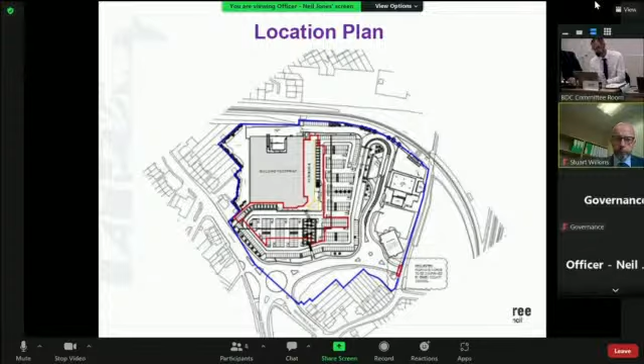But you can have pedestrians and cyclists, and it is a fairly well-used crossing. So just for wider context, Cut Throat Lane carries on up to Motts Lane, and there is a cycle path which is going to be continued, which I'll come back to later, going up to the northeast of Witham. This is the station down here, but we consider Cut Throat Lane to be quite an important corridor for transport, particularly sustainable transport.

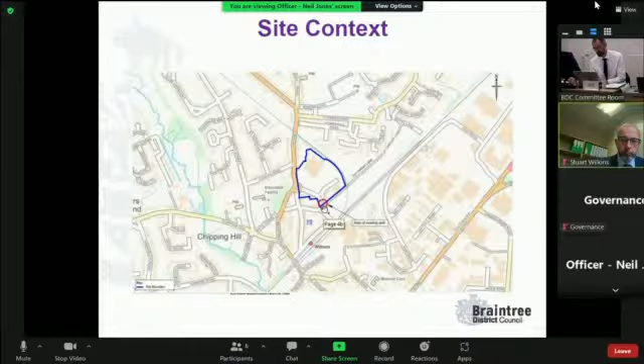A couple of photos just showing Cut Throat Lane, quite narrow as you can see. The survey drawings supplied with the application show approximately 3.7 metres in width on this side, coming down towards Albert Road. On this side we're down to about 2.5 metres in terms of width. So no footways or segregation, potentially two-way traffic, particularly as traffic comes into the entrance to the car park, which is just here. You can see we're potentially opening up onto what is a fairly restricted highway arrangement at the moment.

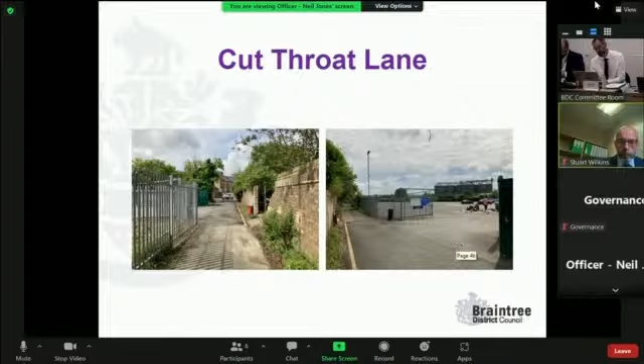Just in terms of context, this is Albert Road, the actual junction if you're going to come down onto Cut Throat Lane. This is looking just up from there. Traffic would come down from here and either continue down Cut Throat Lane to the commuter car park, or could continue around in a loop from Braintree Road to Albert Road. This is towards the station.

This is a drawing showing what the applicant was proposing with the application originally. So what they were proposing was demolition of the wall, as required by the condition, and providing improved pedestrian and cycle connections to Cut Throat Lane as part of the works they were proposing to undertake. But they weren't proposing to provide vehicular access, which is one of the things the condition did require. What they were showing on the drawing here is a curb would be installed along here with some form of railings as well to prevent vehicular access.

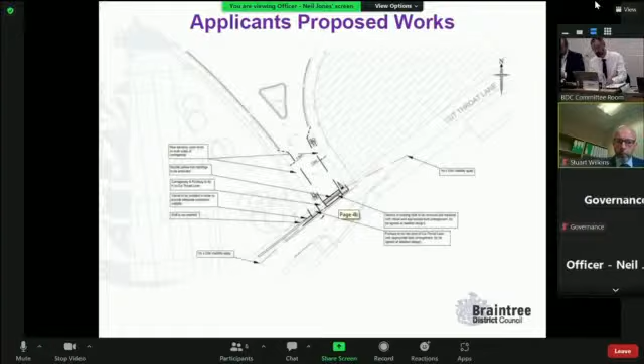The reason this was the proposal that Morrison's brought forward was that there was a discussion on site with highways officers prior to the application being submitted. Both the transport consultant for Morrison's and the highway officers were concerned that if vehicular traffic was permitted onto Cut Throat Lane with the current arrangement, it would potentially be unsafe given the restricted visibility vehicles would have of people walking and cycling, and vice versa, coming through to access the commuter car park. So that was the germ that led to the application being made to vary the condition.

Given the objections raised with the original application, we asked the applicant to demonstrate in more detail what the issues were. They provided a drawing showing some of the issues that would arise if the opening were widened, the wall taken down, and vehicular traffic allowed through. This would create a vehicular access with traffic potentially moving in all four directions—a complicated junction with restricted visibility. Even allowing for relatively low speeds, the visibility required couldn't be achieved because of the wall that would remain to the flats and beyond, which would restrict visibility severely to the sides. That's why, while we're satisfied safe pedestrian and cycle access can be provided onto Cut Throat Lane, vehicular access is not proposed.

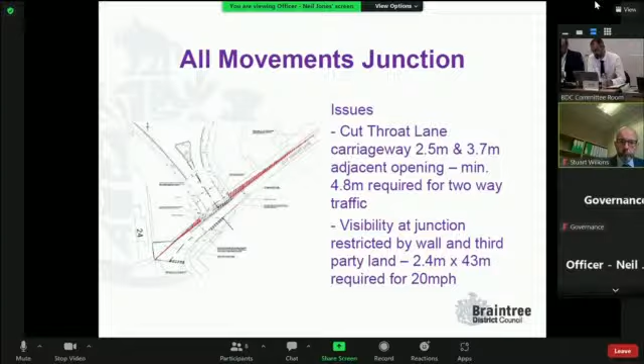There are also drawings provided by the applicant showing tracking of a vehicle at the junction, which show it would be very tight given the available carriageway widths for manoeuvres. While it's true there could be signage to restrict movements, if you're creating a junction with vehicular access there's a risk people won't follow the instructions, or will come down without realising where they're going, not want to go into the car park, and potentially turn off. The other real risk is conflict with pedestrians and cyclists using Cut Throat Lane.

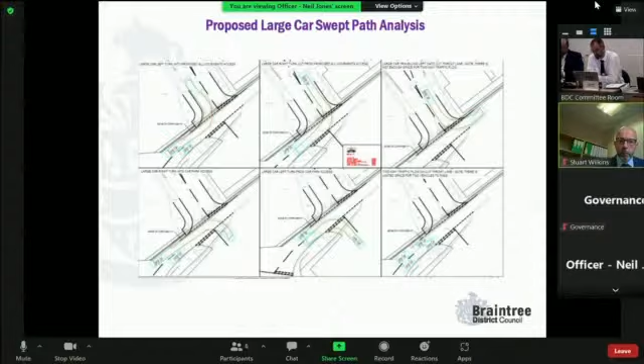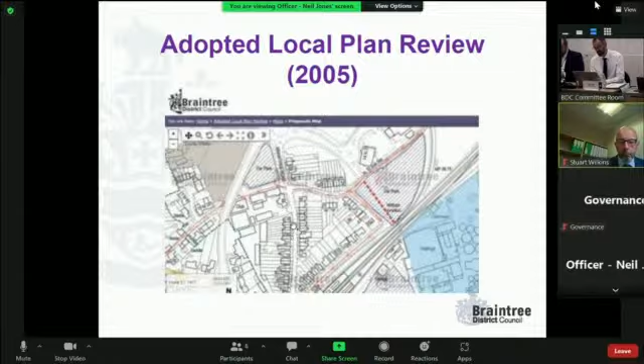There is a policy context to this—it wasn't simply something that spun out of the Morrison's appeal with the planning inspector looking at this on a whim. In the adopted local plan, the 2005 plan, there's a road improvement scheme. You can see here the Crichel Court flats, the roundabout, and the wall. This red dotted line coming across the commuter car park shows a potential road improvement scheme, with the idea that the unnamed road off the Crichel Court roundabout could continue through to Albert Road, reducing some of the vehicular traffic currently coming down Braintree Road and looping around the one-way system to get to the station.

That designation is proposed to be carried forward to the Part 2 local plan, so it's kept in. There haven't been objections to it, so it remains in. But having checked, there isn't evidence or modelling that supports the potential benefits of the road scheme. So while it's in there as an aspiration for the council, we unfortunately don't have a firm evidence base for what the potential impacts, positive or otherwise, would be on the local road network.

We're very mindful, as I've mentioned a few times, of the importance of Cut Throat Lane as a sustainable travel corridor. While it is open to vehicular traffic, and there will continue to be traffic coming to the commuter car park as at the moment, the remainder of Cut Throat Lane going up towards Motts Lane is lightly trafficked—very occasional traffic from perhaps the allotments and the odd house. Having walked and cycled along there many times myself, I'm yet to encounter a vehicle during the day, certainly outside peak hours. So it's quite an attractive walking and cycling corridor, relatively safe for cycling because you don't have that potential conflict with vehicles.

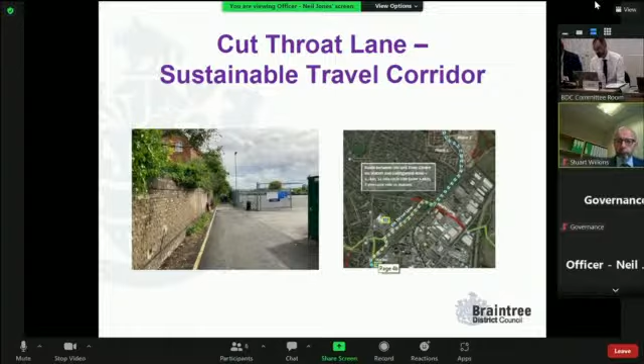This is the North East Witham development, which is almost completed, being built by Bellway. As part of that scheme, the cycle path will be provided across open space coming down to Motts Lane, where there's a bridleway bridge over the railway line, providing a pedestrian and cycle connection to Eastways, but also allowing a connection down towards the station. So we see this as an important walking and cycling route within the town, providing connections to the station and potentially employment towards the town centre. If we're looking at encouraging walking and cycling, we think it's important that this corridor is protected so far as possible.

So what we're looking to do is vary the conditions. The condition would remain as set out in the committee report - the wall would be demolished and the pedestrian and cycle connection formed. What we're proposing, because there are additional works we want to see, and a process to go through to gain approval and make sure the road is stopped up once it's opened - we think it will be difficult to cover that by a condition. So instead we're proposing to vary the Section 106 agreement already in place, specifically the first schedule, which was concerned with cycling anyway, making it a highway works condition.

So what we're saying in effect is there'll be highway works specified within the 106, between the Crittall Court roundabout down to the wall and Cut Throat Lane. There will be works involving the removal of the wall to create pedestrian and cycle usage straight away through to Cut Throat Lane, but the works will also allow future use by vehicles through to Cut Throat Lane when and if a safe through route can be achieved.

So the proposal is that the works are carried out so a vehicle could technically drive through on day one, but before the works are completed and before the road is opened, we would make sure a suitable barrier or means of preventing vehicles from driving through is put in place. That barrier or bollards could be removed at a future date if a scheme comes forward - whether the redevelopment of the car park, or the car park operator providing evidence that a connection should be formed through to the car park alone. But that would be done later.

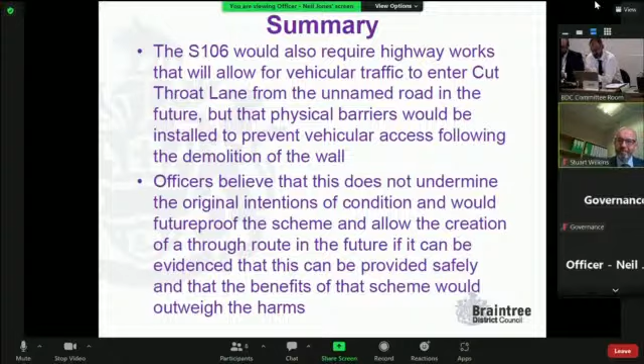I'm minded to support the officer's recommendation, given that it has the support of county highways, and there are achievable improvements to safety, such as visibility for cyclists and pedestrians. But I wonder about the 3 years. If these benefits are genuine, we want them as quickly as possible. Is there any way we can encourage Morrisons to bring forward the demolition works sooner than 3 years?

Yes, we did think quite a lot about the time for complying with the condition. It certainly could be a shorter period. We're conscious that legal agreements involving highways are very complicated, technical and quite involved, as Matt Bradley from the Highway Authority would echo, I'm sure.

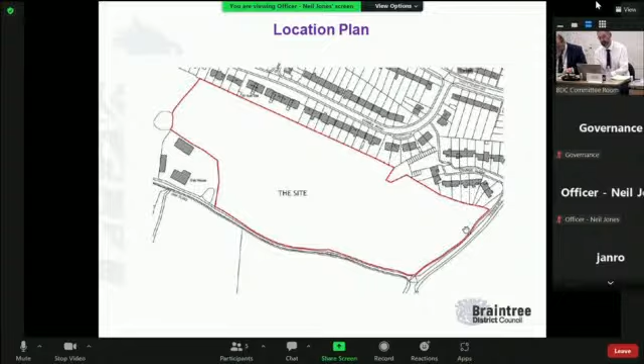So the site is north of Oak Road. Oak Road is a fairly narrow lane that runs along the south of the site. This is Tidings Hill along the side of the site, and this is the existing edge of the town, with Coney's Road and Grange Close being the nearest residential streets. In terms of context, we're at the southern end of the town of Halstead here - Oak Road here, and then we've got development going on over here with the Bloor and David Wilson scheme being built out. Oak Road continues round here to Tidings Hill.

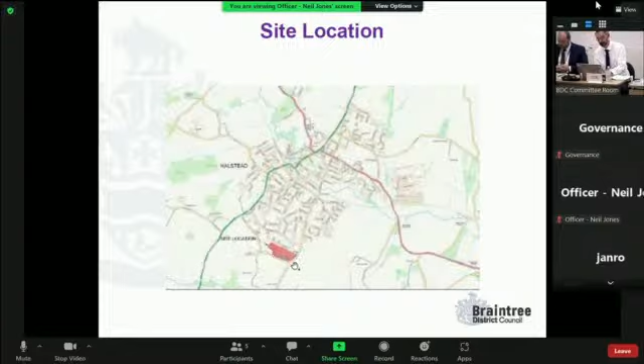I've been asked to point out, with regards to access - Councillor Pell raised this recently - there are 2 gated accesses at the moment off Oak Road. These gates were put up to close off openings by the previous landowners, before Bellway purchased the site. The gates remain in situ to secure the land and make sure nobody goes on there in the interim. They won't be used for access to the development when residents are living there - they'll certainly be closed off. There will need to be a temporary use or access off Oak Road for a short period whilst the main vehicular access off Tidings Hill is formed.

I was asked to explain the situation, because I think it had been reported on some social media offerings within Halstead, and there was a concern that actually what Bellway were going to do was access their development off Oak Road.

That's certainly not the intention, never was and isn't, but I'll just clarify that now.

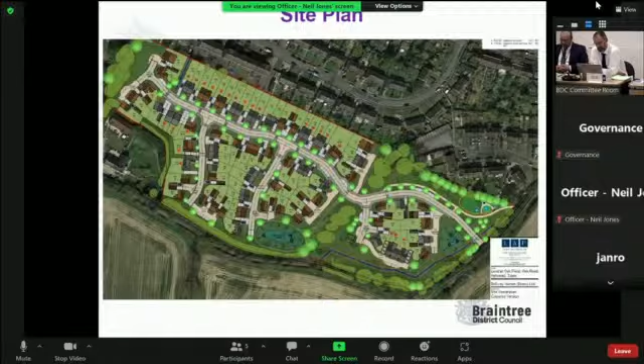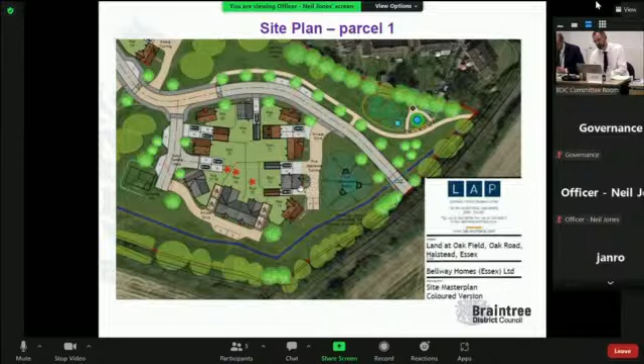Then coming through the old field boundary, a sort of centre point connects into the site where the majority of the development is. The main road, such as it is, comes through to the end where it terminates on a rather nice view of a large TPO oak tree, which was a deliberate urban design choice - a good termination to the street.

Again, you can see on the main street trees on both sides of the roads continuing through, and then we've got some drives, lower order roads coming off, with some tree planting on these, although not on both sides.

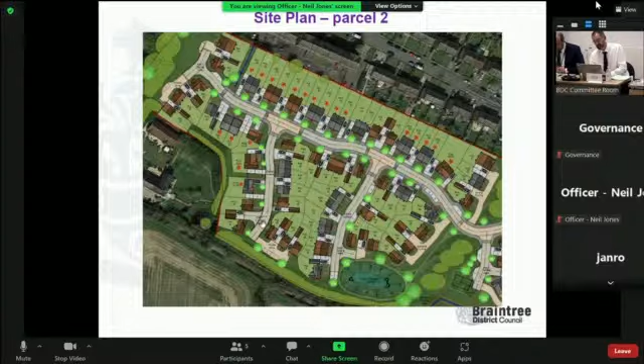There's policy compliance, or exceeds policy compliance, in terms of affordable housing. 35% of the development will be provided as affordable housing, which equates to 28 units. You can see the distribution of them there.

Usually for a development on the edge of a town, our policy or practice has been to ask for a minimum of 30% affordable housing. When the outline permission was granted, the applicant offered 40%, well in excess of what the council would want, but we secured it through a 106. Bellway's scheme proposes 35%, still in excess of the minimum required by policy.

That was for a slightly lower number of dwellings, so 28 units in net terms is the same as we would have expected originally when the outline permission was granted.

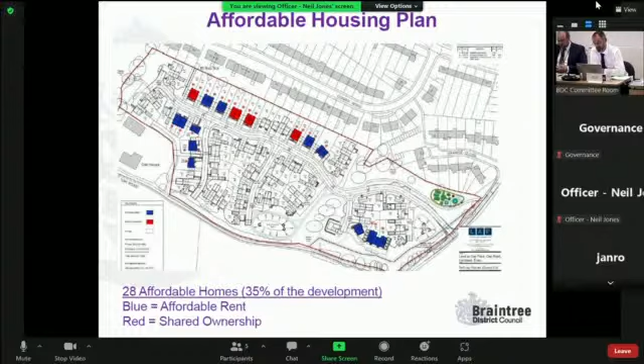I won't dwell on these, but this gives a flavour of the house types proposed. We range from two-bed maisonettes, provided in a house-style form, so quite attractive and in keeping with the rest of the housing proposed.

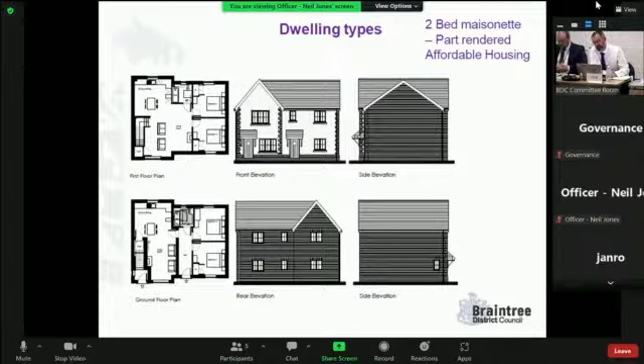We've got a choice of materials to add interest to the street scene - render and bricks, sometimes mixed, as seen here, where you've got this sort of quoining around the edges.

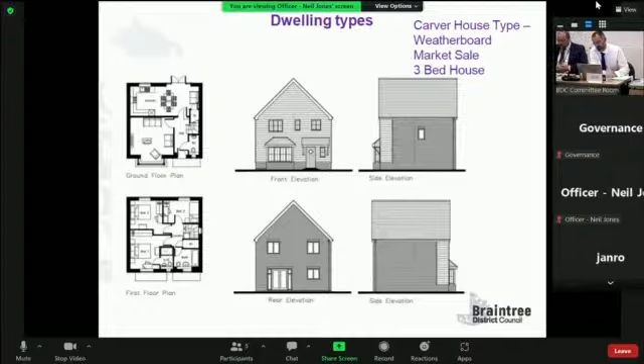This is a 3-bed market sales house, proposed to be clad in weather boarding. These are some other examples of house types, including bungalows - a couple offered for market sale and a couple for affordable housing.

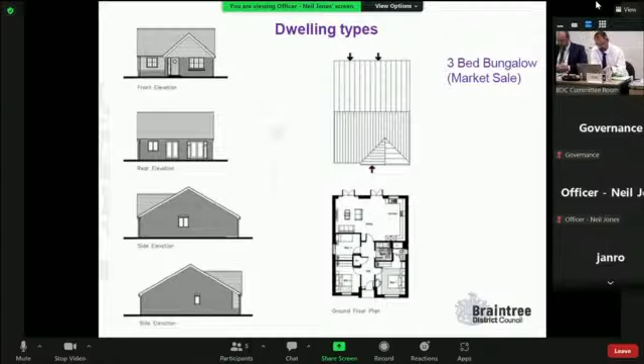The applicants also provided street scenes to show how the streets will be composed with the houses together, so you can get an impression of what the development would look like. I'll just go through these quickly.

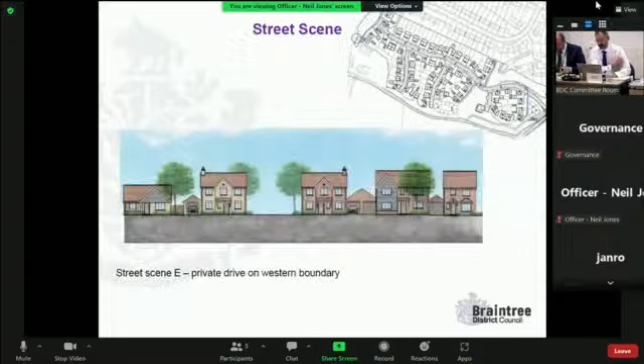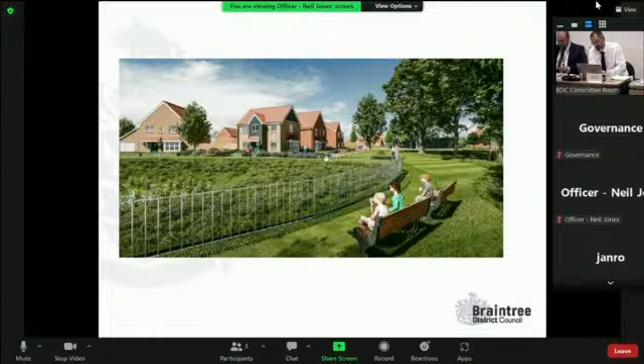So tree-lined streets, as we explained previously, were subject to much discussion with the applicant through the pre-app process. Officers were pushing for tree-lined streets throughout the development, and this is what we feel comfortable with after having negotiated.

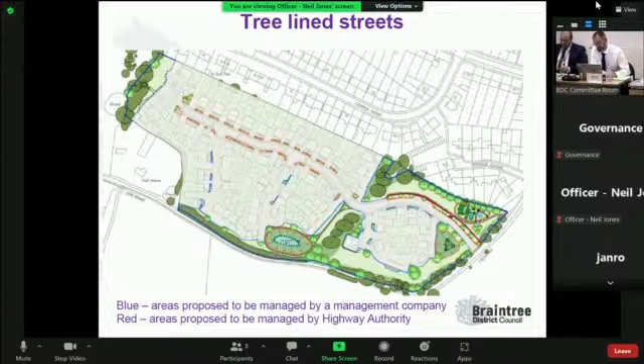So there is some tree removal and some hedgerow removal which is necessary, which is set out in the report. This was always acknowledged and accepted as part of the outline permission.

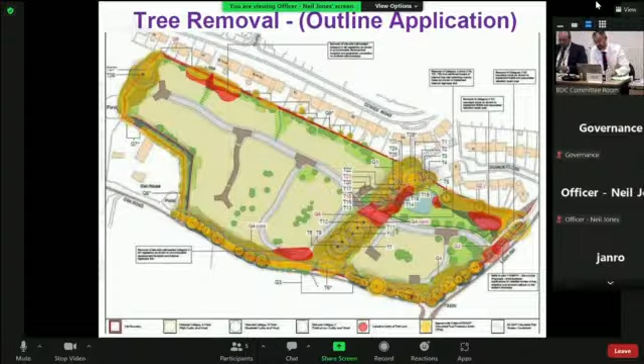So just for reference, this is the tree removal plan which was provided as part of the outline application. This was just to give an impression of what was likely, but it does make it clear that there was always going to be tree and hedge removal.

And then this is what's proposed by the applicant. So you can see we've got the gap being created for the road to come through in the middle here, through that existing field boundary. Tree removal on Tidings Hill here, which we've written a fair amount about in the committee report, so I won't revisit that. And then some removals around the edges of the site here.

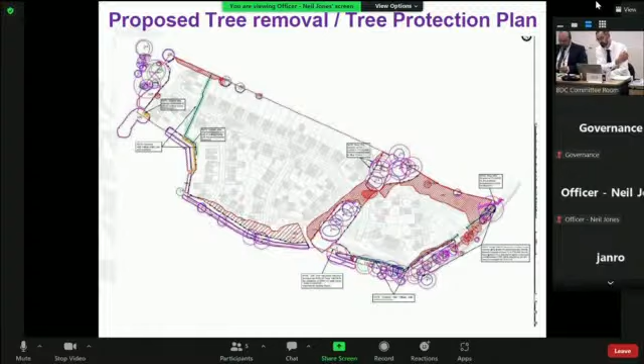If the rest of the site is being developed for residential housing, it's not going to have fantastic amenity value. In fact, it's going to cause issues as it matures. It wasn't usable in terms of open space either. So we think an appropriate balance has been struck here in terms of retaining what's important and valuable around the edges, which provides a screen and a setting for the development, but removing the lower quality and lower level planting around some of the edges.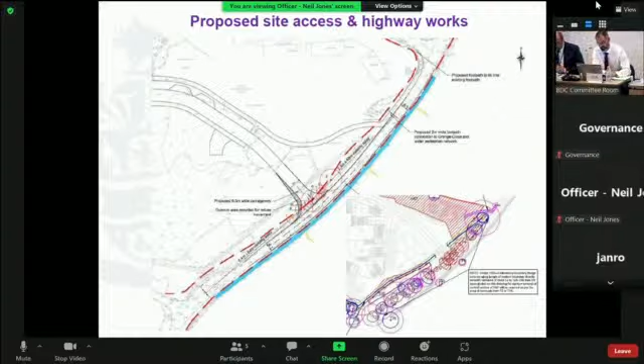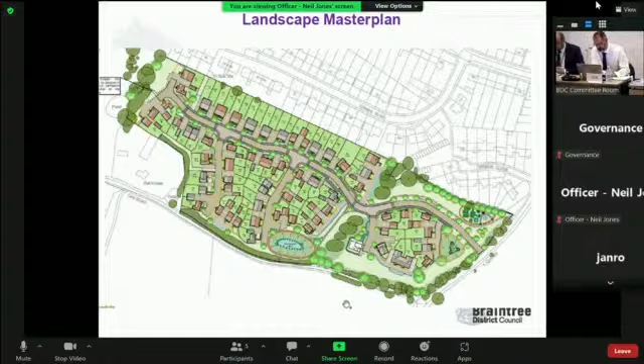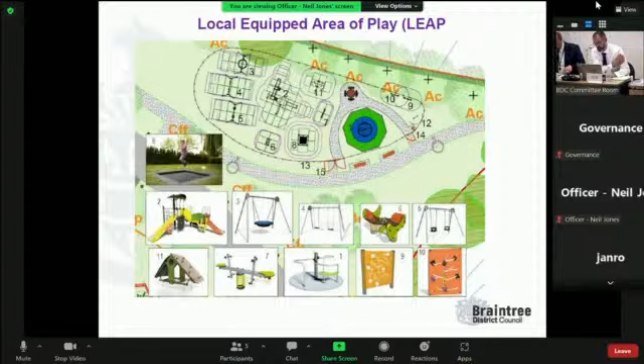The play area was amended following comments received from the Town Council earlier in the process, and some additional equipment was included, or more equipment was included, which was more accessible for people with mobility issues or disabilities. So we consider that was a positive response to a comment raised by the Town Council.

So in terms of a summary, as we've set out in the report, previously we were saying as an adverse impact there was the conflict with the adopted plan policies. However, we think that must be tempered against the Section 2 plan, which allocates the site for development. So overall, we would say the proposed allocation weighs in its favour.

There is harm to trees and hedges. As I've said, some will need to be removed, but we think what is being removed is justified and reasonable, and is being mitigated to an extent by the new tree planting.

In terms of benefits, obviously housing delivery, as you heard, we are to some extent relying on this already within our housing land supply, so it's very much a site that we want to see coming forward in terms of delivery. It'll be an additional 80 dwellings, 28 of them will be secured as affordable housing. The outline permission was for 70, which we were counting on already, so the additional 10 units adds to that benefit as well.

We do consider the site to be accessible in terms of access to facilities and services, albeit on the edge of Halstead, but within a distance which we think is reasonable to walk. We do think there will be economic and social benefits to the town more widely, so moderate weight is assigned to that.

So overall, the site has been assessed to be suitable for residential development previously. It's also proposed to be allocated in the local plan. We think the scheme layout, following a lot of work by the officers and developer, is one that we can support enthusiastically. The detailed scheme received no objections from statutory consultees, and in terms of the planning balance, notwithstanding the fact that we don't count an extant outline planning permission within the balance now, we still think there are benefits which far outweigh harms, and we still think the members should be passing a resolution to grant.

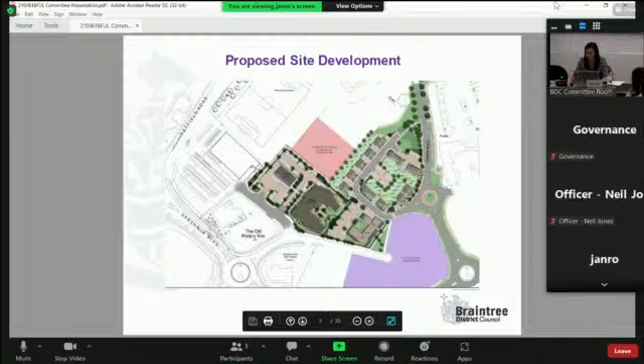The site has been previously designated for development following the outline planning permission and approved master plan on land adjacent to the south side of Maltings Lane, whereby there is already an extant planning permission to provide a mixed-use development. The site is located within the town boundary of Witham, and as such, the principle of redeveloping the site for a mixed use of residential and commercial premises is acceptable.

Vehicle access to the residential dwellings and apartments will be via an existing access, located here from Owers Road, adjacent to the primary school. Oh, sorry. The care home and retail units will be accessed from the southwest of the site and from Reed Road. The car parking dominates the overall layout of this mixed-use development with limited soft landscaping.

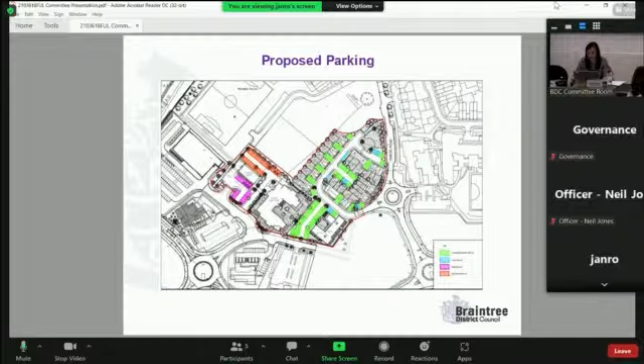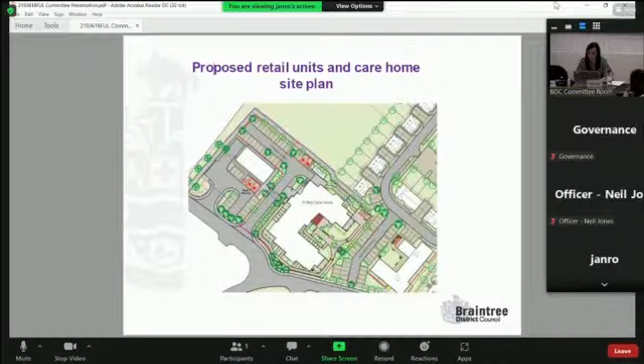In relation to the site plan for the retail units and the care home, the site plan shows the retail units dominated by hard standing and car parking to the frontage. It also acts like an island with the care home parking to the rear of the site. The retail units are considered to be bland and dominated by hard standing car parking.

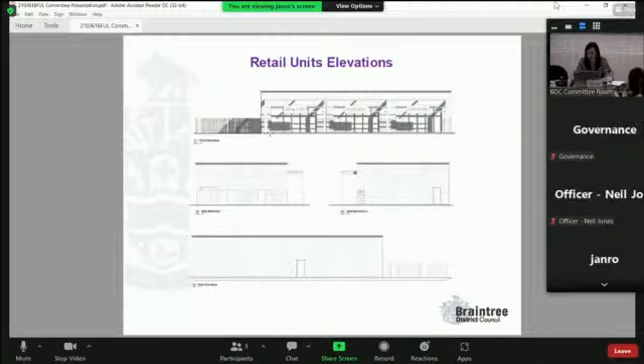The retail units have little interest to the facades, and not all elevations will benefit from active frontages. For example, the side and rear elevations, which are highly visible from the footpath to the north and west of the units, have little interest. Overall, the retail units appear odd and poorly proportioned when compared to the 3-storey care home proposed and the mass of the Aldi store.

Overall, the proposal fails to provide a suitable active frontage to the main road, which fails to provide legibility and visual interest. The forward siting of the development is considered to be out of character with the surrounding area, whereby development is set back behind landscape frontages, and its impact, due to its scale, with limited setback, is unduly imposing, and the little separation dominates the amenity.

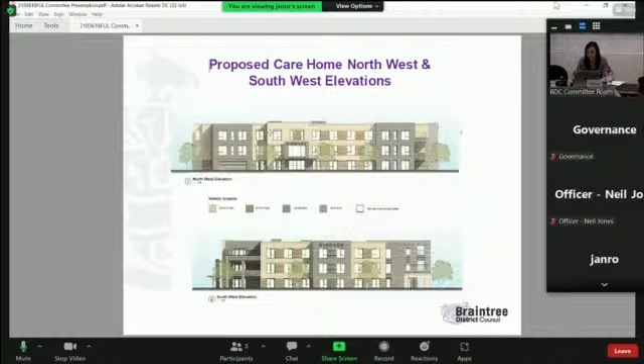With respect to the apartments, the design is also considered to be poor quality. The scale fails to relate to prevailing character and would appear large and dominating with little setback again from the street frontage. The U-shaped building has resulted in the entrance having poor legibility with no prominence within the street. The elevations fail to break up the overall massing of the development through detailed design.

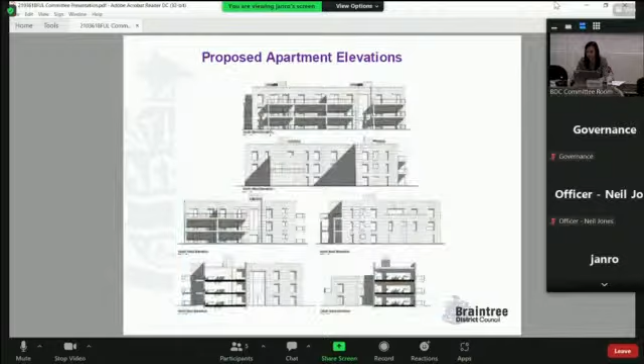The balconies poorly integrate to the building and appear to be an add-on. The central amenity space is enveloped by 3 sides of the building, and the overall layout continues to be dominated by hard standing. In terms of the dwellings, there are various types of dwellings.

As discussed earlier, the layout again is dominated by hard standing, and some of the parking areas have poor end stops to the streets and vistas, and parking is divorced from some of the housing it serves. The elevation designs are quite weak and poor and lack articulation.

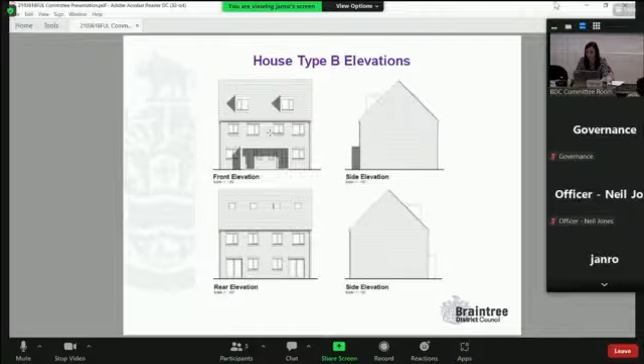The dormers fail to align with the windows to the lower levels, steep roof slopes, and dwelling type AC would result in a gable end above the existing ridge to this property, creating an awkward form and appearing higher than the other dwellings. It is considered the dwellings create an incongruous form of development in the street scene, which is not acceptable and a direct result of an overly compact form of development.

In relation to the quantum of development, officers are concerned for future residents by reason of limited separation distance between the care home and flats for overlooking and interlooking, and in addition, a number of the houses proposed would have limited distances to the boundaries below the Essex Design Guide.

Amenity space does meet the requirements, however there are concerns in relation to the position of the flats, whereby they would be adjacent to future commercial development that has not come forward, and that quality of amenity space could be compromised. Concerns have also been raised in relation to the proposed landscaping, which is not considered sufficient in line with the NPPF.

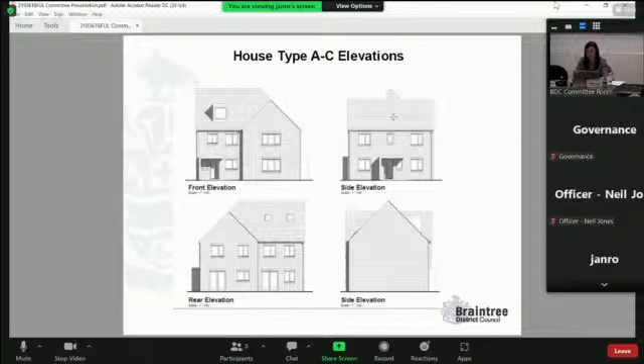No objections are raised in relation to highways based on parking and traffic information in relation to the impact on the highway network or safety. No objections are also raised in relation to ecology, heritage and impact on residential amenity, lighting or contamination.

In respect of the Section 106 agreement, 13 affordable homes would be required as part of this application. The applicant has indicated 60% affordable rent, 40% shared ownership. However, the Council's Housing Enabling Officer has stated that the Council's usual requirement is 70-30 in terms of the mix, and the tenure mix is not acceptable, proposing flats only, whereby the need for Witham is for 3-bed dwellings as opposed to the flats provided.

Other obligations include open space, healthcare provision, education, which have not been secured through the legal agreement, together with the RAMS payment.

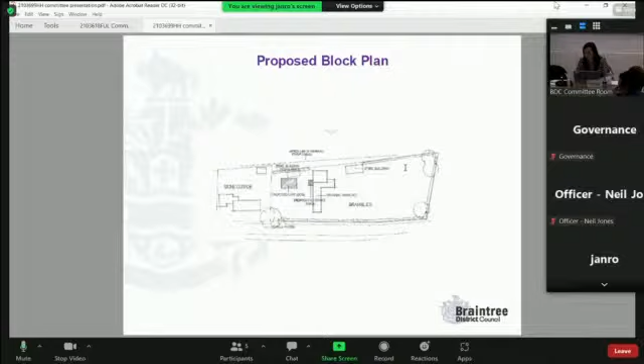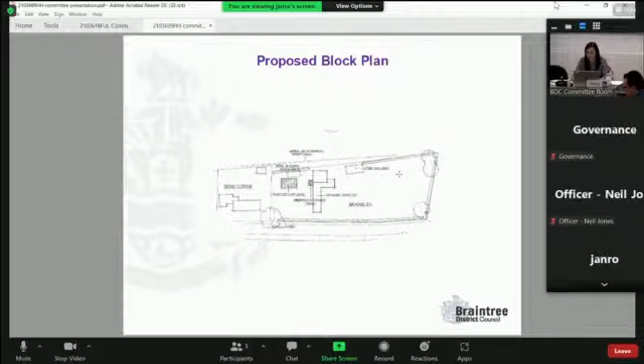Planning permission is sought to construct a detached two-storey cart lodge together with a ground floor side extension to the existing dwelling. The site is located within the countryside, outside of defined development boundaries. The principle of development is acceptable as the provision of the cart lodge can count towards parking in accordance with policy, and extensions to houses are acceptable subject to all planning policies being satisfied. In terms of the elevations, the design and appearance of the cart lodge is considered subordinate to and compatible with the character of the residential plot, the main dwelling house and the wider countryside location. The detailed design includes a two-storey form with roof lights to the front elevation and a rear dormer, staircase and balcony to the rear. During the course of the application, officers negotiated with the applicant to amend the siting of the cart lodge, as previously it was attached to the dwelling.

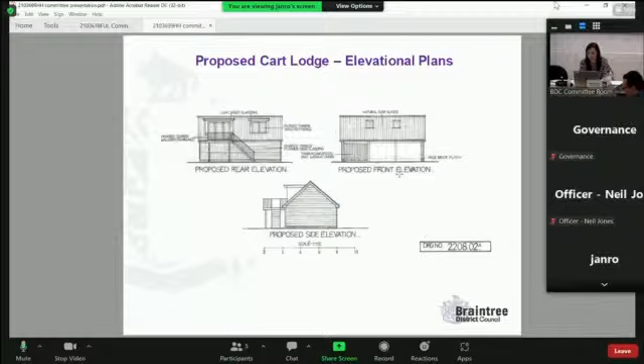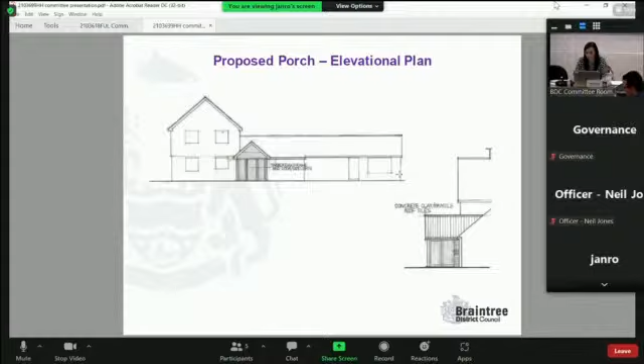The cart lodge structure allows sufficient provision of parking, and additional parking is available elsewhere on the plot. The proposal will have no impact on residential amenity owing to the detached nature of the plot and distance from the proposed development and neighbouring boundaries. The principle, design and scale of the development, together with the highways and impact on residential amenity, is considered acceptable. Therefore, we are recommended to grant planning permission. Thank you, Janine. Thank you.

Councillor Mann. Appears to be entirely within policy.

Chairman, I move the officer's recommendation. Thank you. Let's find a second. Councillor Ritchie, yes, okay. Did you wish to speak? Nothing further to add, thank you Madam Chairman.

Anyone else wish to add anything further? Well, it has been moved and seconded that we grant this application. It's been moved by Councillor Mann, seconded by Councillor Ritchie. All those in favour? Thank you very much, members.

Thank you, that brings us to the end of planning applications. We now come to item 6, members' forum proposals consultation. This can be found on pages 206 onwards, and Chris is going to introduce this and deal with the subsequent questions.